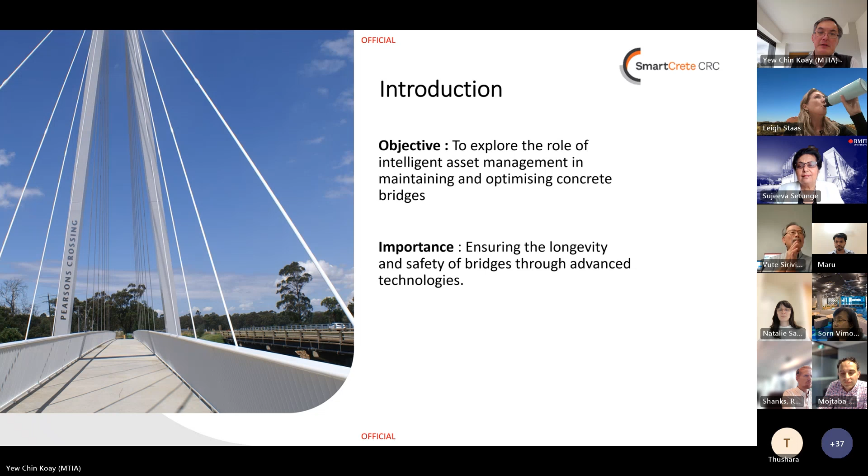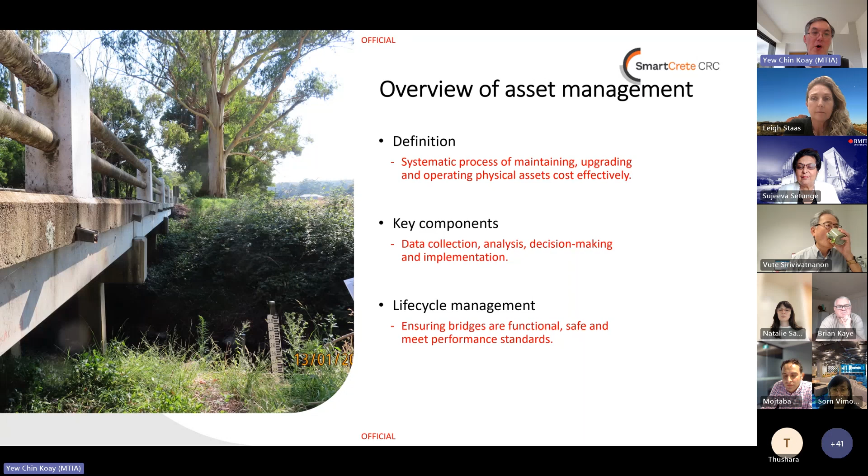This is quite interesting. I read the news yesterday, and I thought to share it with everyone.

In Victoria, the region will face ongoing growing pain because of aging infrastructure and booming population. Our structure is getting older, but the population keeps growing, meaning our old structure needs to accommodate more vehicles or more population. So try to imagine if you have an old structure but need to carry more load or more frequency on it. That is a challenging part.

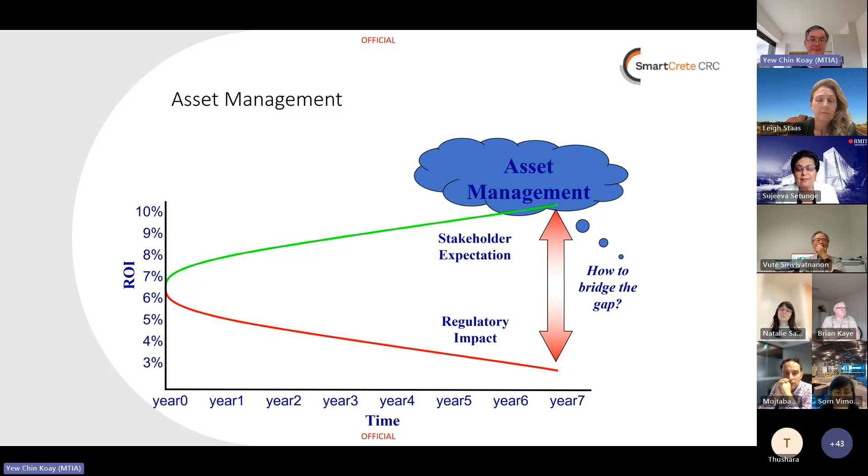This shows what the asset owner wants to achieve. The asset owner wants that when they initially spend more money, the risk should be much lower. That makes sense. But in further years, they want to spend much less money, and accept the risk increasing a little bit further from year 0. But the performance they always want centered, meeting expectations all the time, the same.

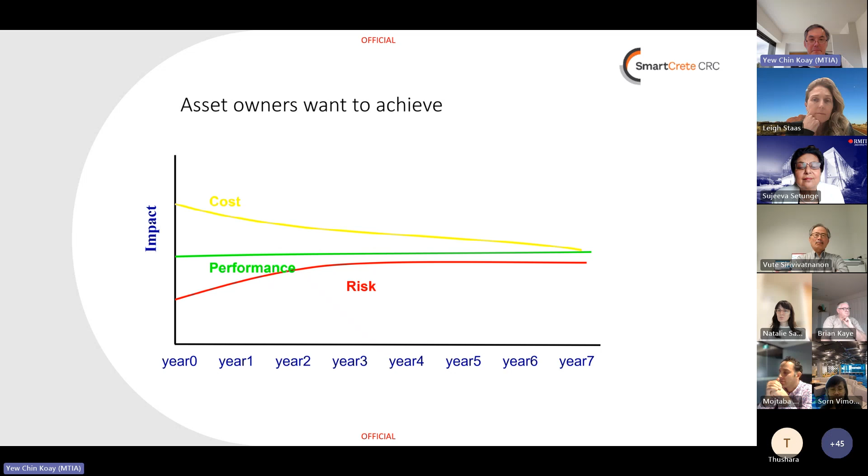But in reality, the nature of the infrastructure business is quite different. When you spend more money, your performance is much higher. When you spend less money, the performance is much lower, but the risk is much higher. So that is the reality.

Compared to the asset owner's perspective and the nature of the infrastructure business, there's an adverse gap inserted.

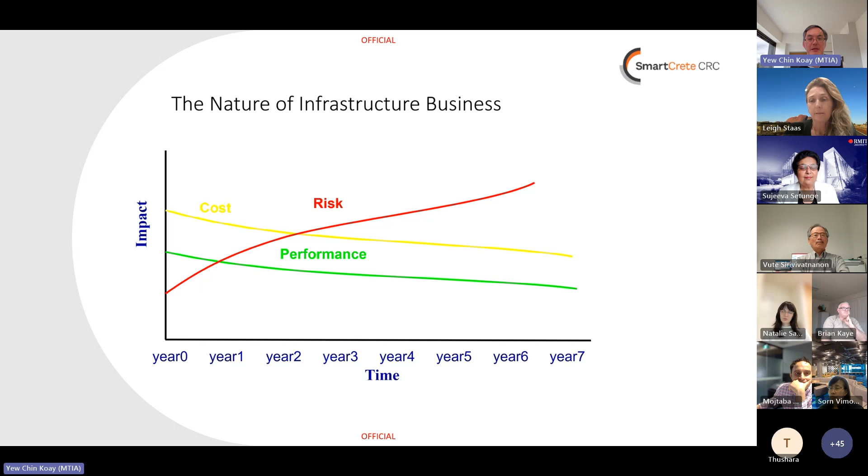So the most important key considerations, what are they? The important things are life cycle, cost, risk, and performance. That is quite important, what I call the core consideration. But the important thing for intelligent asset management is how to do the optimization, how to centralize the key decision making, and how to do the systematic process.

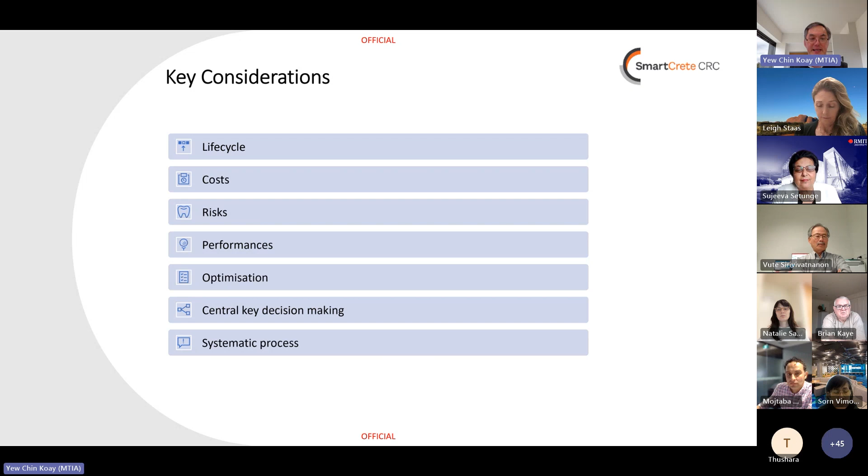Right now we move to the challenges in managing concrete structures. The challenge in managing concrete structures is aging infrastructure. In Victoria, 75 or 80% of bridges were built before 1975, which is about 50 years old already.

Another challenge is deterioration factors due to environmental exposure, load stress, and material degradation. Load stress is based on the vehicle. Back in the 1970s, vehicles were less than T44, 44 tons or less, or MS18 or HS20. But right now we have 160 ton vehicles, so we need to design the loading up to full SM1600.

Another challenge is limited resources. Budget constraint, I think, is a challenge for all asset owners. Every year they have a limited budget to maintain the structure.

The other challenge is expertise. Expertise in bridges, in different materials - they need to really understand the material behavior and structure behavior in order to do proper maintenance. That expertise is the challenge.

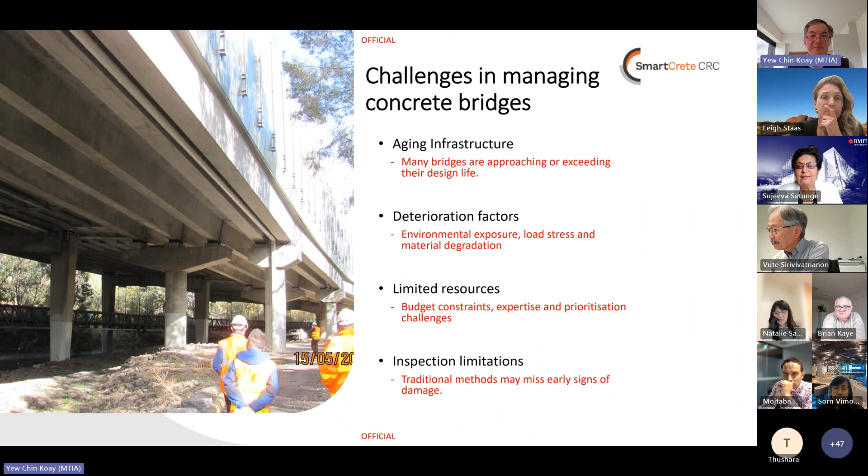And the other challenge is inspection limitation. As you know, some traditional methods have challenges like missing hidden defects. How can we train the inspector well to do this type of inspection?

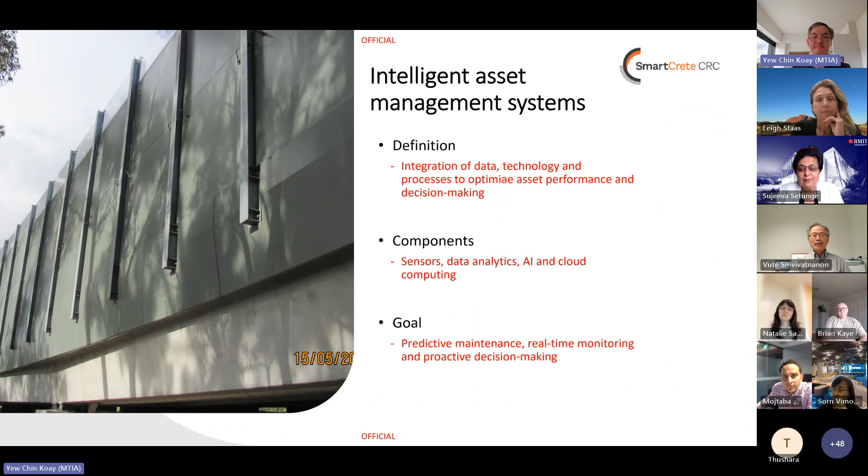I'll follow the start, but when I'll have a look later. Yep. Ashish, could you please put your, thank you.

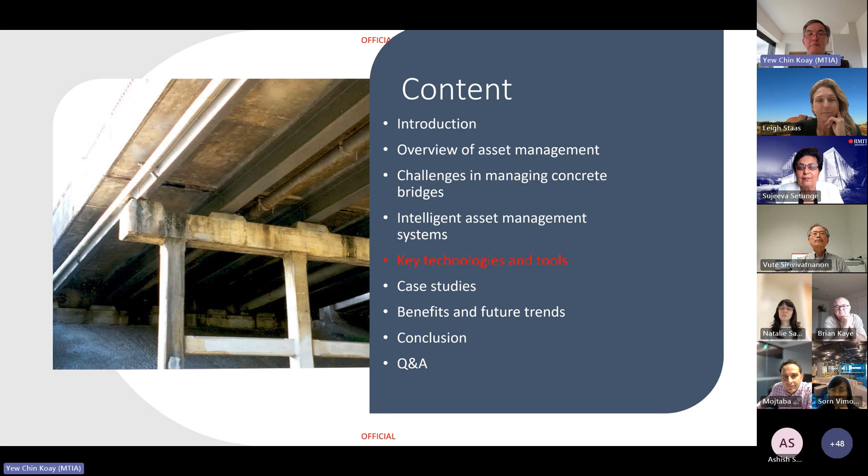Right now we move on to key technology and tools. The key technology and tools are sensors and IoT. This is all in here. I've highlighted in black and red color.

Black color is where we have trialed or done prototype testing or proof of concept testing in Victoria. The red color is still working with the university under a research project.

Sensor and IoT is structural health monitoring or real-time data on bridge condition, which we have done. I'll explain in my next few slides in the case study.

Data analytics is more on predictive modeling, forecasting deterioration, which I'll bring to my case study as well. For this data analytics for predictive modeling, we use bridge deterioration modeling, worked with the university 8 years ago to come out with the model, utilizing our inspection data.

AI and machine learning is for pattern recognition and identifying trends and anomalies in the data. It also does automated decision support.

Digital twin is more on the virtual model, replicating the bridge condition for analysis and testing, and scenario planning, simulating the intervention and their outcome.

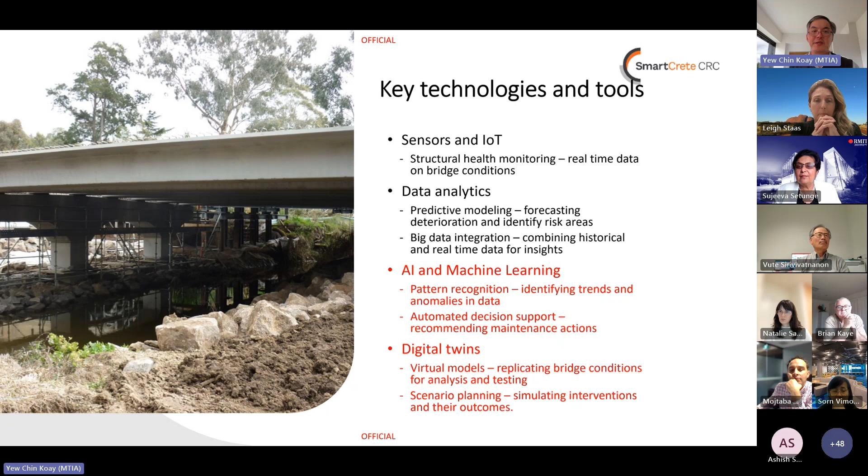So case study one is a deterioration modeling approach of the bridges. This was working with the university 8 years ago.

The approach is to utilize our inspection data. For the inspection data, we can do either an empirical approach or a physical approach. If you use the physical approach, you get more accuracy because you are very close to the structure, you can get the data you want.

But the empirical approach is more suitable for the asset owner who owns a lot of structures. They can't really do physical inspection for every single bridge, so they can use an empirical approach to develop a model and predict how the structure will behave.

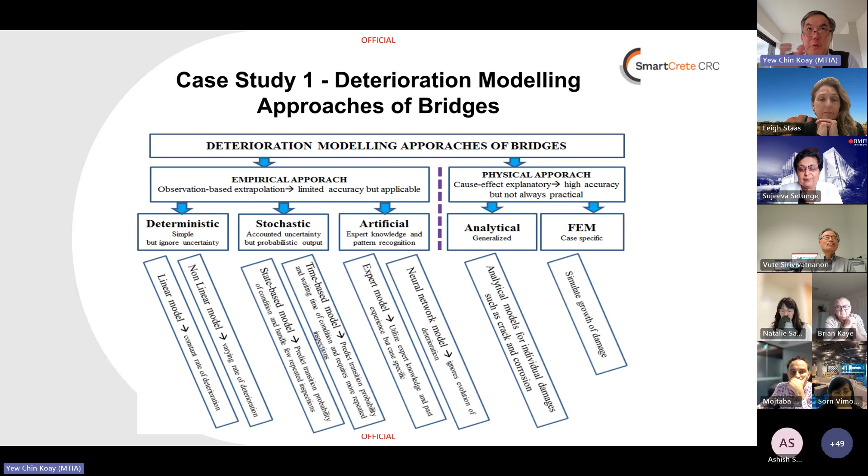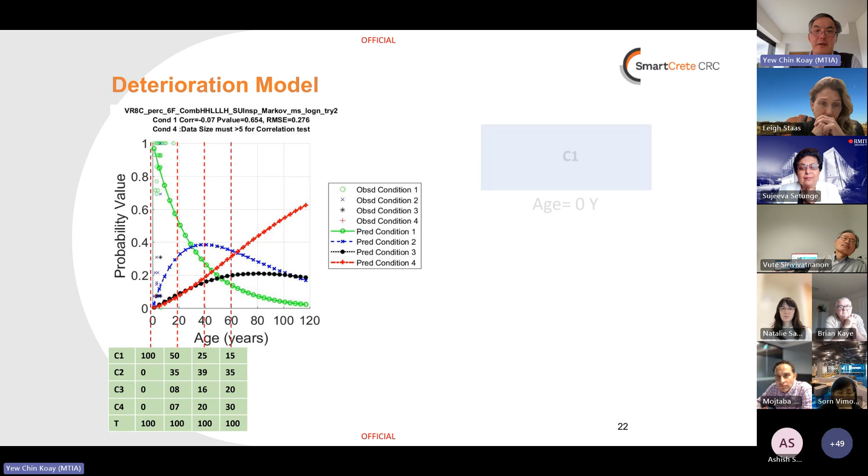This is one example I'd like to share. This is more on the probability value and the age in years. Here you can see the curve with condition 1, green color; condition 2, blue color; condition 3, black color; and condition 4, red color.

Basically at year 0, you can see the structure is like brand new, condition 1, meaning no defect. Condition 2 is a minor defect. Condition 3 is a major defect. And condition 4 is a severe defect.

So when you come to age 20 years, you can see that condition 2 is starting to be introduced, same as condition 3 and 4. So condition 1 is reduced.

When you come to age 40 years old, you can see condition 1 is getting less, condition 2 is introduced more, and condition 3 and 4 as well. So this deterioration model will help you predict how the structure will behave in the future. It also helps you predict the budgeting required to maintain or repair the structure.

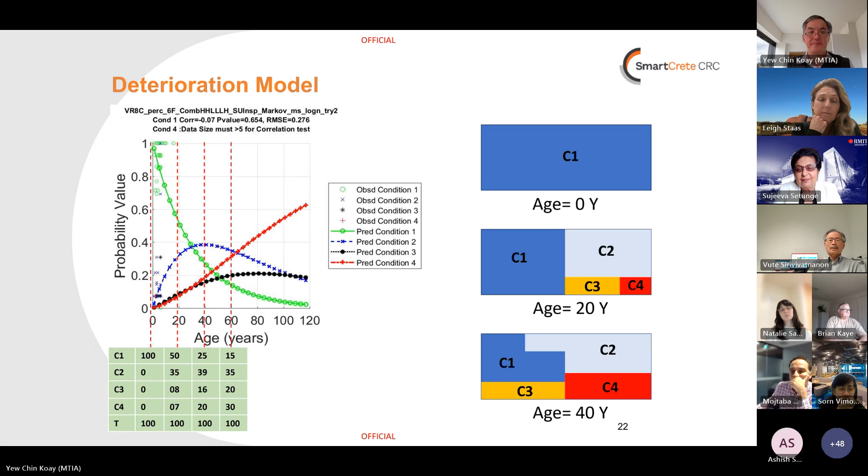The deterioration modeling basically relies on inspection data. That's level 2, which is condition inspection, and also inputs in the significant contributing factors. There can be between 6 to 14 of them. Then after that, you develop the model.

Then after that, the model comes out with a predicted condition output. The model needs to be refined as you get more data, and you can redefine the model to get more reliable predicted conditions.

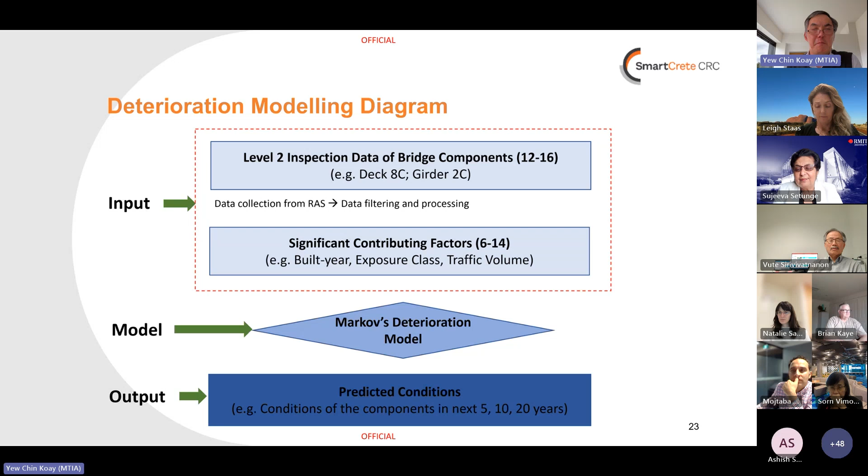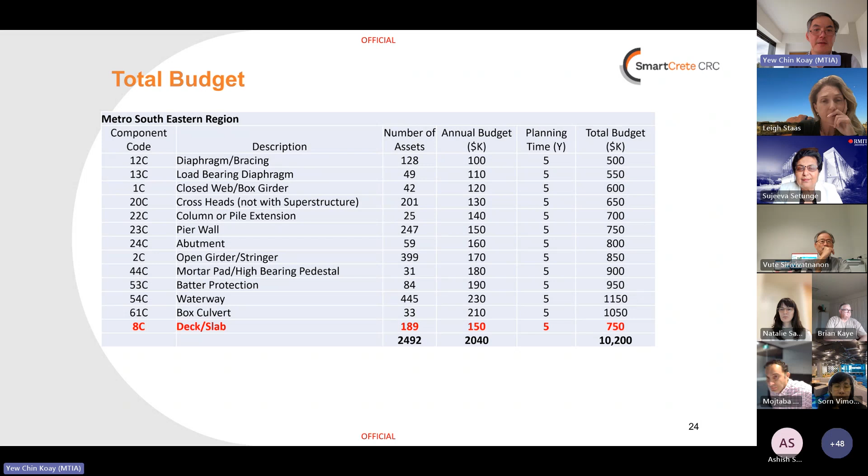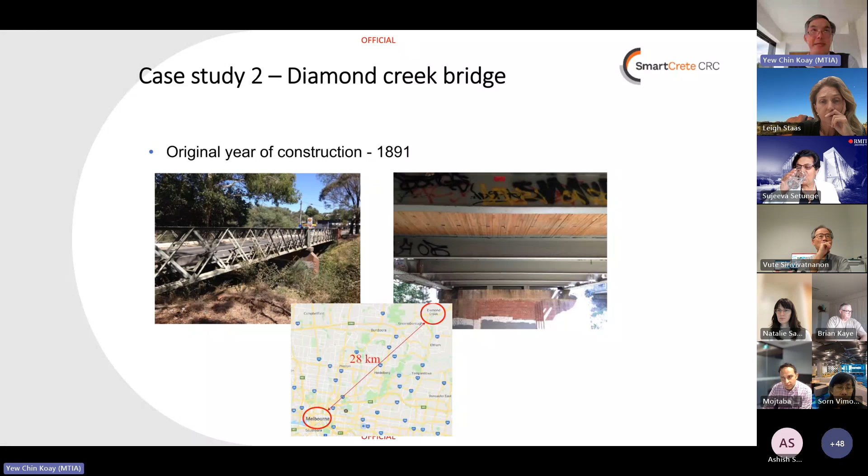The second case study I'd like to share is on the Diamond Creek Bridge. This is trying to use a sensor to study a new material and see how the structure behaves. Diamond Creek Bridge is a two-span steel structure, over 100 years old.

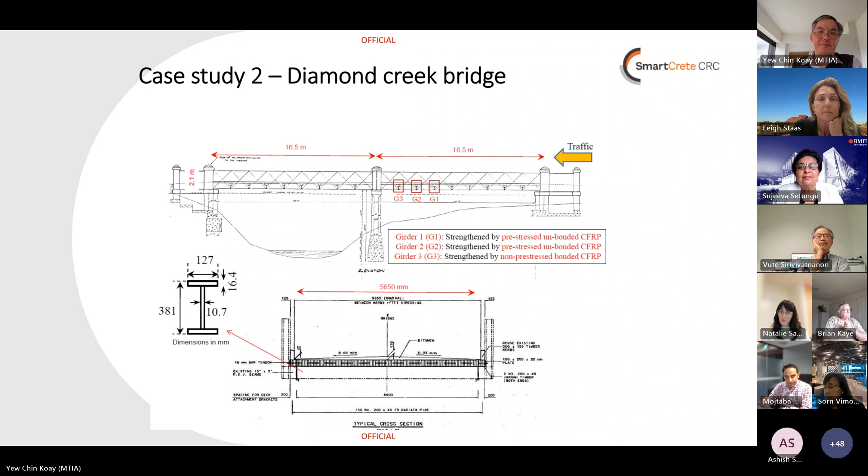We would like to use carbon fiber reinforced polymer to strengthen it. As you know, if carbon is attached directly to the steel, you get the electrode and that can form corrosion. So what we do is pre-stressed carbon fiber strengthening. This project is working with EMPA at the Switzerland University, and Swinburne and Monash University. We install a sensor on the carbon fiber to understand how it reacts and how the structure's behavior looks.

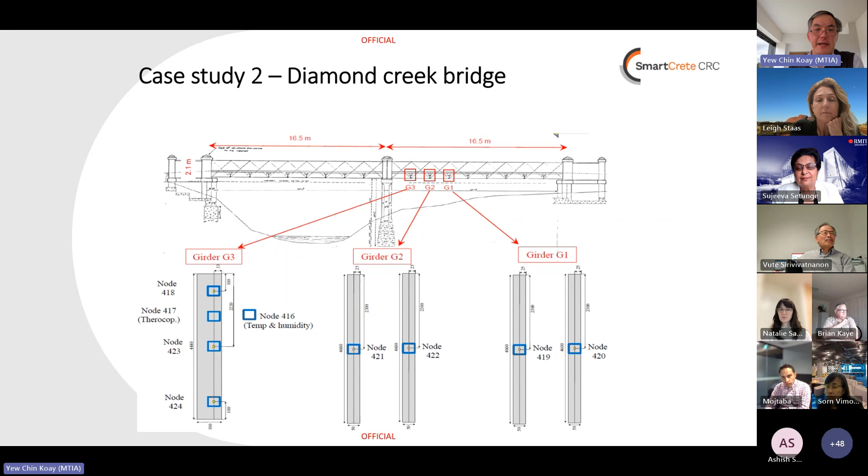So after we install the sensor, we get a full load truck to pass through and study the behavior of the structure. The third one is more on super load movement.

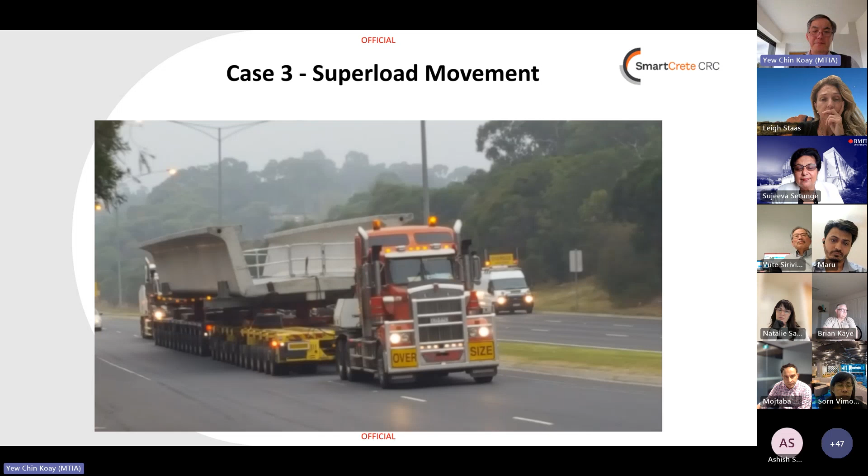This is an unusual or overload truck passing through the road network - how the thing looks, how to provide support on the road network. This is a U-trough for the level crossing project. They cast the U-trough in Kilmore and want to deliver it to Middleborough. So from there, they've got a structure - a substandard structure - to allow the truck to pass through. In order to minimize damage or prevent that, we install a sensor to monitor it.

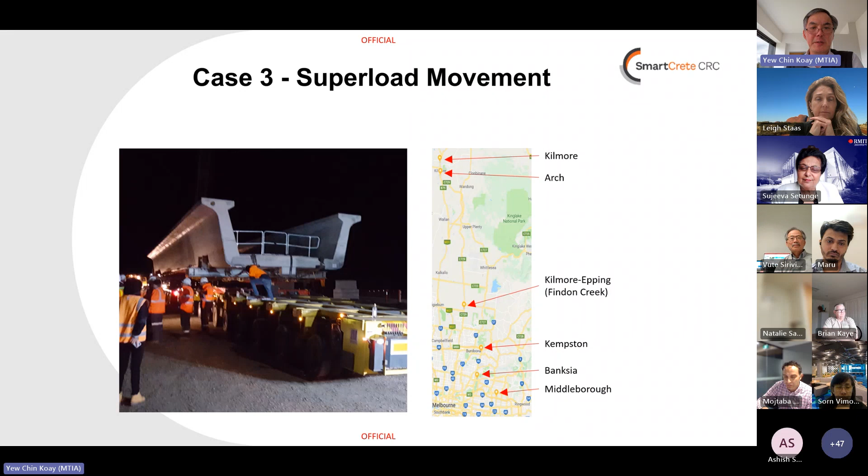This project is collaborated with Monash University to work on it. So this is a bridge here. They install a sensor to monitor the behavior of the structure.

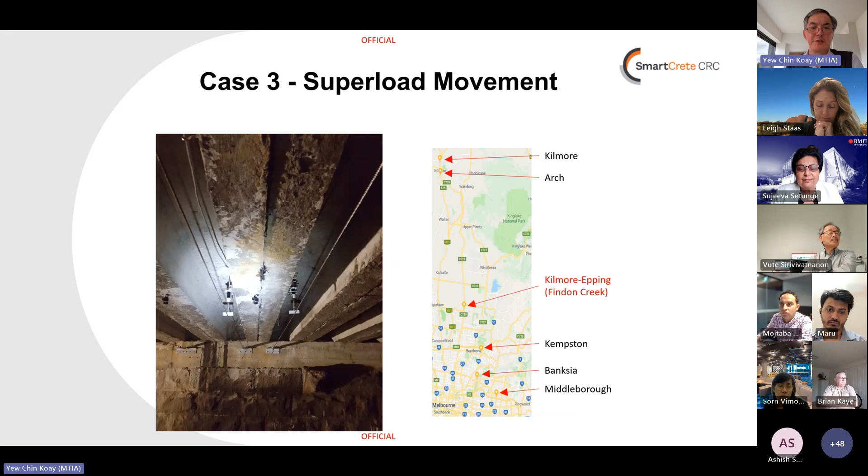And this is the Kilmore-Epping. It's a U-trough, a very old structure, built in the 1950s. We try to monitor whether the structure is able to support the truck passing through over the bridge.

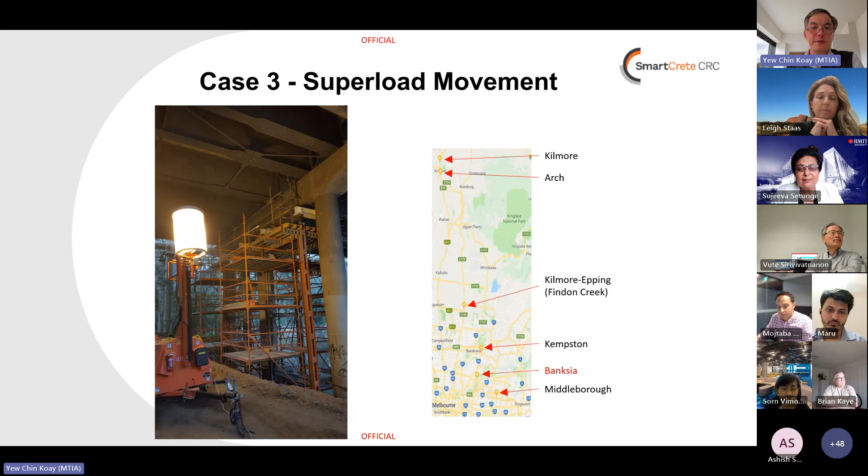And this is Banksia. It's a steel structure. We have to provide temporary support or strengthening to let the truck pass through over it.

The next thing I'd like to touch on is the benefit and future trend. The future trend in bridge asset management is more on AI-driven maintenance. We need to increase reliance on AI for automated decision making. We also need to leverage or utilize the integration of 5G, because 5G is coming and will enhance connectivity for real-time monitoring, especially for structures in regional or rural areas where you can get more stable connections for the sensors.

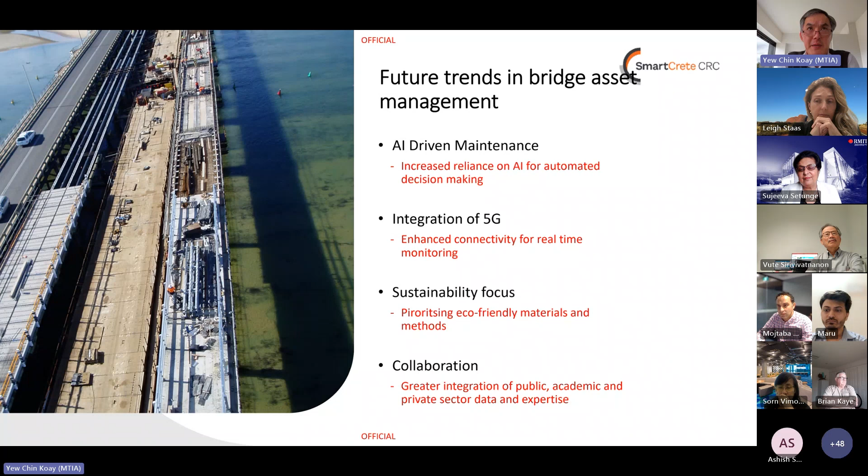Another thing to consider is sustainability focus, prioritizing eco-friendly material and method. I think most importantly, we need to bring everyone - the experts - together to get the project implemented.

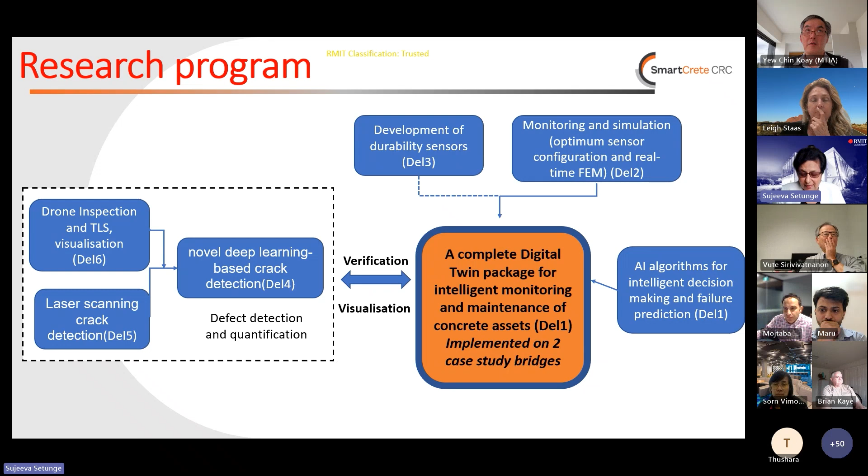This is a very ambitious target, and we brought together a number of different elements of research to achieve it. Around the central target you'll see monitoring and simulation, optimum sensor configuration and real-time modeling, development of sensors which you don't usually have, visualization, drone inspections, terrestrial laser scanning, crack detection, deep learning to identify and detect damage, and intelligent decision making and failure prediction for maintenance optimization. That's the plan we had.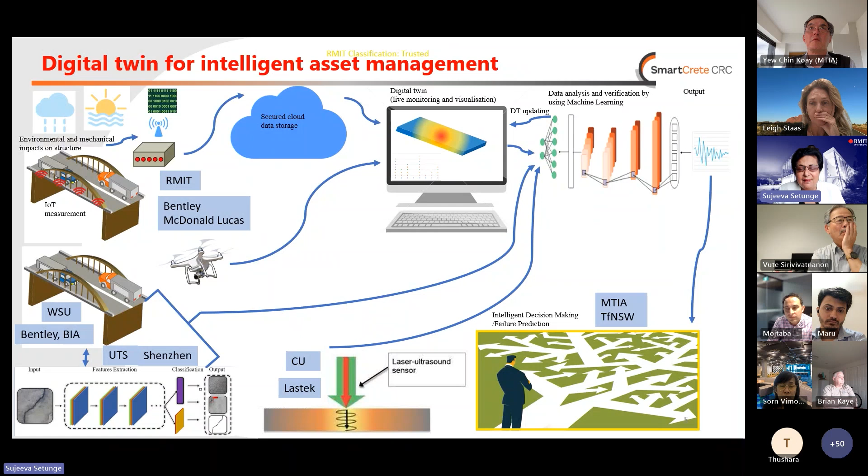When you look at the integration of colleagues from different research institutions, research teams, and our partners, it's a complex picture. However, if you divide it into several parts: health monitoring, visualization, and asset management undertaken by RMIT; visualization, specifically laser scanning, and parts of modeling undertaken by Western Sydney University; University of Technology Sydney specializes in deep learning for crack detection; and Curtin University focuses on non-destructive testing and damage detection using laser ultrasound. So we have our respective partners helping with different aspects of this research program.

The challenges we encountered are quite significant. The research challenges identified are, in the first place, optimized sensor placement. What we were looking at is that structural health monitoring is normally implemented in landmark structures.

It is not anything new. We do have these implemented in landmark structures, and we do have numerical models linked to the sensors. So what we were looking for is technology that can be deployed across a large number of structures, and in order to minimize the cost and optimize this design, we had to look at optimized sensor placement.

We had a PhD candidate at RMIT looking at this, and then, of course, numerical modeling and field validation. Now, I just want to mention that modeling and validation has been undertaken by others. But what we were looking for is a model which can then be queried to interpret the sensor data.

So we were looking at reverse order finite element analysis for interpreting sensor data, and then connecting the numerical structural model to a visualization platform, deep learning for damage interpretation, non-destructive testing to complement the digital twin, and also regular validation, calibration, and low-cost embedded sensor technology for early warning on durability.

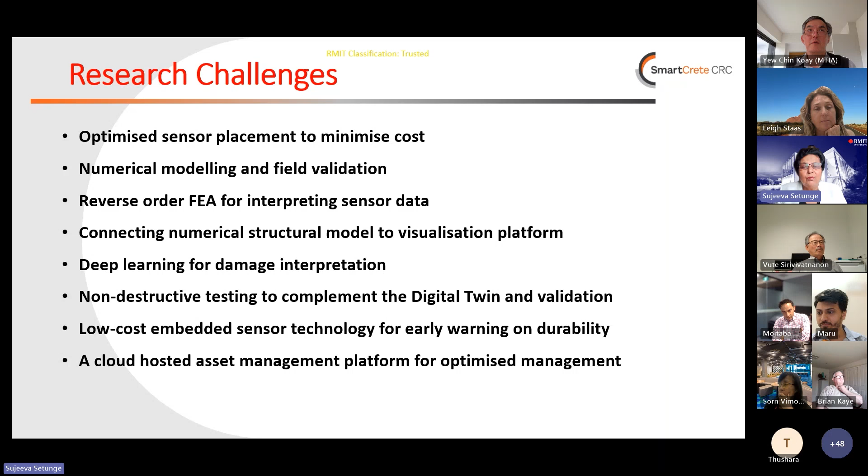So we started with a simple structure in lab and field. We looked at a laboratory-based structure, a very simple steel structure, to see how we do this reverse engineering, or reverse understanding, of the sensor input interpretation so that you can feed into asset management.

Subsequently, we used the steel structure provided by one of our partners, Beta International, at Dalrymple Bay Coal Terminal. This was undertaken by Mojtaba and one of his PhD candidates. Steel structures are easier to analyze than concrete structures, so we started with something known before we moved forward.

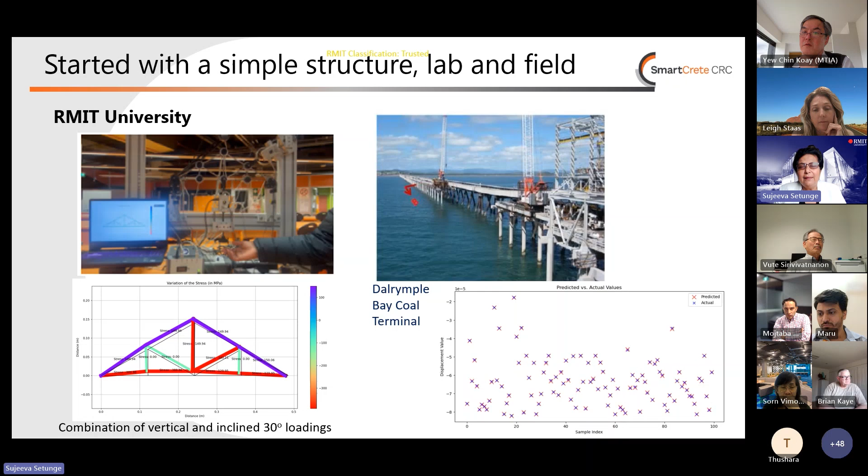At this stage, what we also figured is that live real-time finite element analysis can be quite time-intensive and also expensive for a partner. We looked at artificial intelligence as a possibility to enable us to understand the sensor data and interpret it in a reasonably fast manner. So that's what we moved forward with, and that was a PhD project again at RMIT.

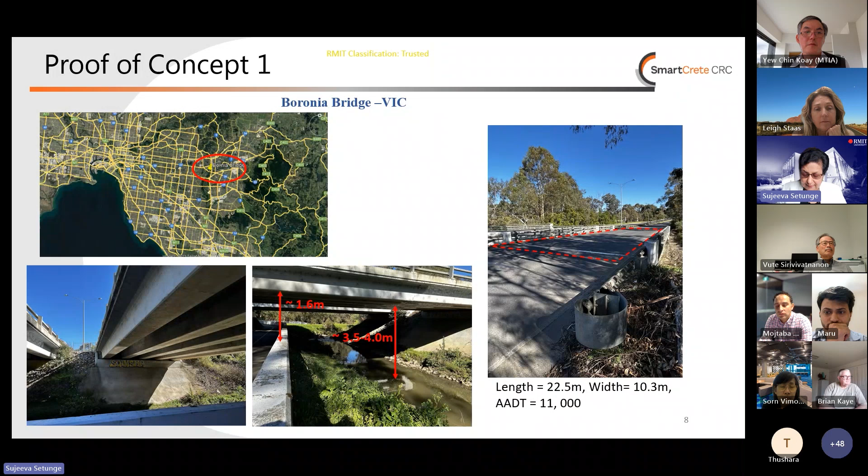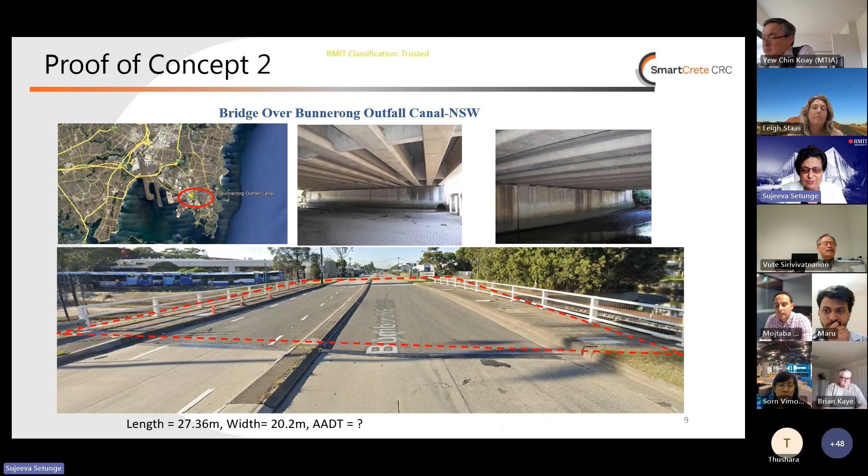With our two partners in the road authorities, we were able to secure two bridges as proofs of concept. One is the Boronia Bridge in Victoria, and the second is the bridge over Bunnerong Outfall Canal in New South Wales. The Victorian bridge is provided by Department of Transport Victoria, with Eugene's help, from Major Road Projects Victoria. The second bridge is provided to us by Harish Sivastra from Transport for New South Wales. We want to gratefully acknowledge their support.

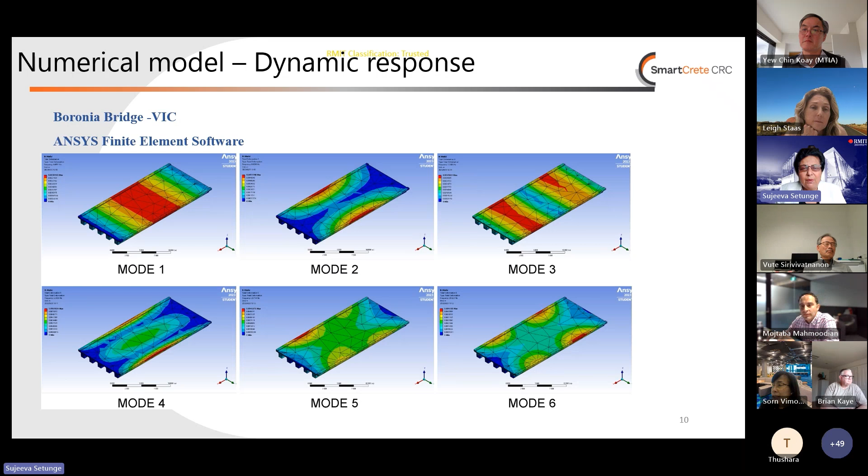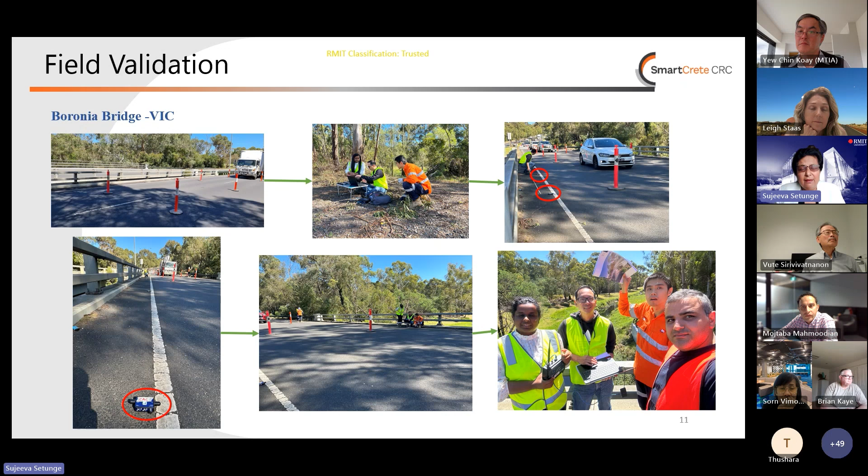So what we started is: first you need to come up with a model, and a typical fast method of validation is using the dynamic response. The modeling has progressed with significant input from partners, and drawings have been provided. We've been able to develop a reasonable model for dynamic response, and colleagues went into the field and worked with Department of Transport for traffic control. With their support, we've been able to validate the dynamic response of the structure, which gave us reasonable confidence about the ability to simulate the structural response.

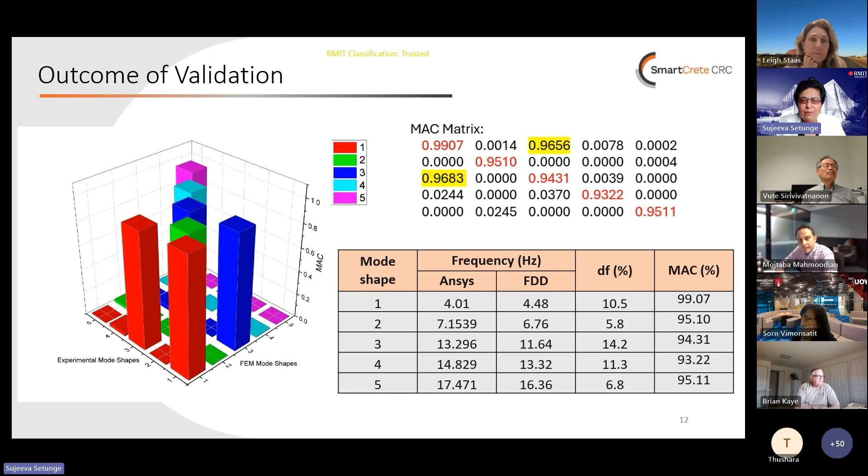I want to say that when we were selecting a structure to simulate, we identified concrete girder bridges as the cohort of structures we wanted to work on for this project, as they are the type most commonly used by road authorities. We thought if we could get these understood reasonably well, we could move forward. During the validation, we observed a reasonable degree of accuracy, giving us confidence to move forward.

The next stage we've been working on is identifying the best method of instrumentation, and we've trialed a number of different methods. We did instrument the bridge for dynamic validation with accelerometers, and for this second stage we are installing sensors which should remain for the life of the bridge. We had a number of challenges—one of our partners was supposed to provide us with sensors, and we did have some issues with that.

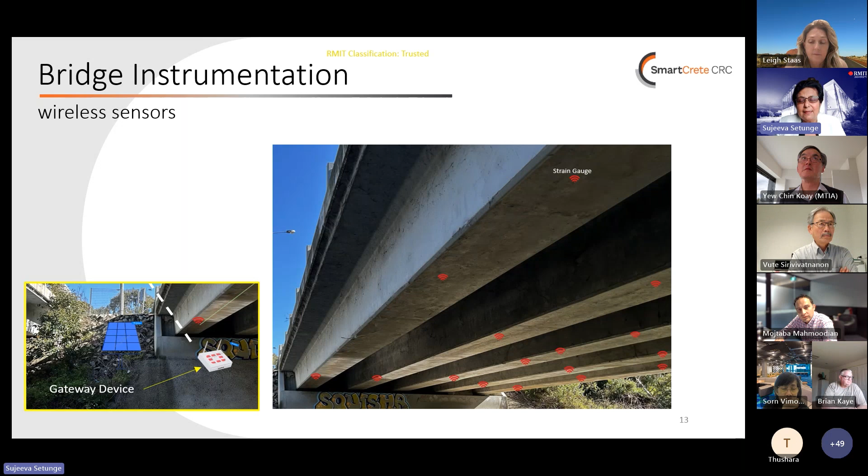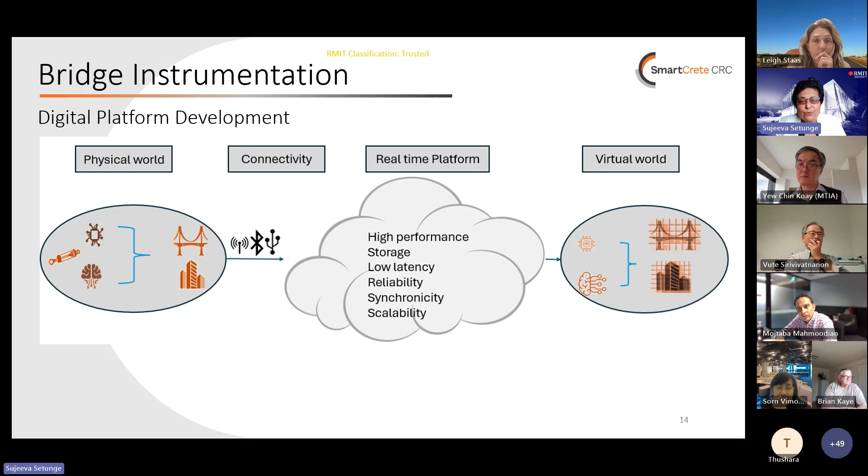Now we are moving forward with wireless sensors for the Boronia Bridge. The next challenge you face is: once you have your physical instrumentation, you need the connectivity, a real-time platform, and a link to the virtual world. We do have cloud access through our asset management platform, developed previously by RMIT, which is hosted on AWS. So we have access to the cloud, and this is what we will be progressing with. The second stage of modeling is now being completed to interpret the sensor data.

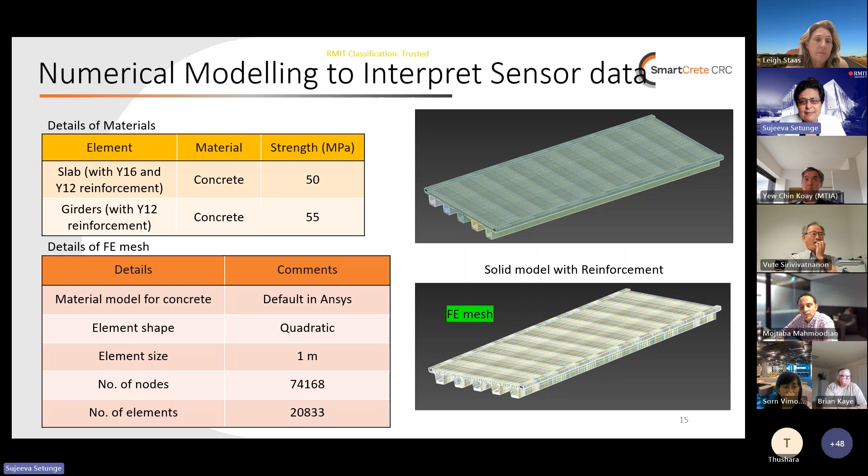As I mentioned previously, the plan here is that you have the sensors installed, your model creates the numerical representation of the structure, and then with artificial intelligence, if you run a number of simulations and create an adequate database, you can use AI to interpret the sensor output so that the road authority can have reasonably fast information from the digital twin.

The other element of the project is developing a durability sensor. Our expectation is that for most durability sensors, condition inspections usually receive information quite late during the degradation process. We were looking for a relatively inexpensive sensor which can be embedded into concrete and interrogated later to determine the chemical changes within the concrete, giving early warning when a structure is undergoing degradation. So embedded and wireless is the criteria I've given. I've asked Distinguished Professor Arnan Mitchell, who is leading this stream of the project, to come up with something inexpensive that gives us warning quite early. They are currently working on RFID technologies for this purpose, and trialing a number of different options for validation.

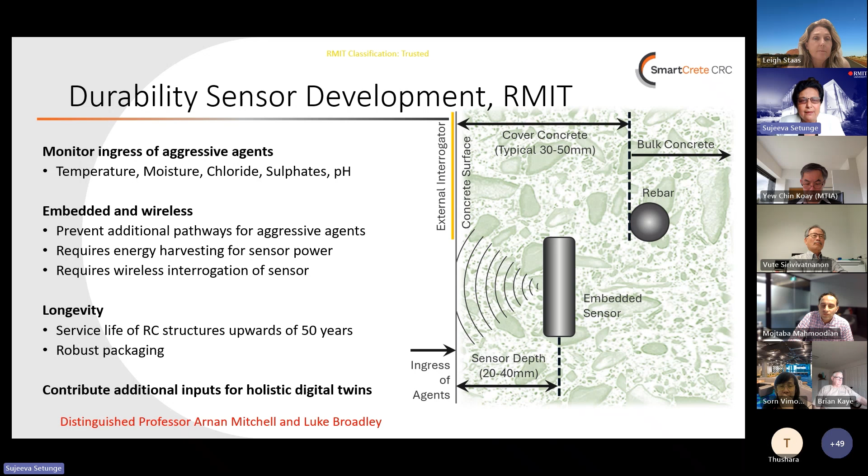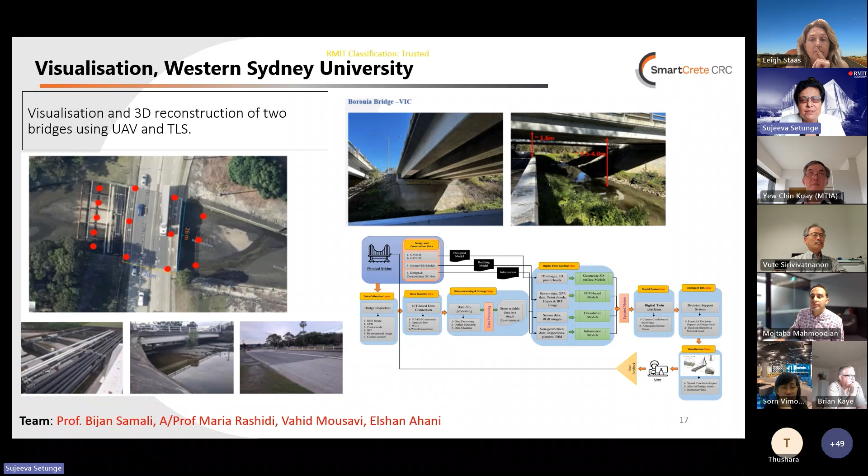Visualization is the second element of the project, led by the Western Sydney University team: Professor Bijan Samali, Associate Professor Maria Rashidi, and their fellows and students. They not only have expertise in visualization, which forms a major part of the project, creating 3D visualizations using UAVs and terrestrial laser scanning to capture the required visual images, but they also understand the numerical modeling validation aspects of the digital twin, which is very valuable.

Curtin University is contributing a non-contact laser microphone system for concrete inspections. This is another very important part of the project, developing a pulsed laser microphone system for generation and reception of acoustic waves, enabling damage detection for different types of damage. You have a concrete specimen with embedded steel bars and different types of damages being trialed in the laboratory for damage detection using pulse laser technology.

The project is led by Professor Abhijit Mukherjee and research fellow Dr. Subhra Majhi, who are progressing this work. The way this fits into the whole project is that once we have the visualized digital twin system, we will require regular validation, and the non-destructive testing method Abhijit and the team are developing is very valuable for that.

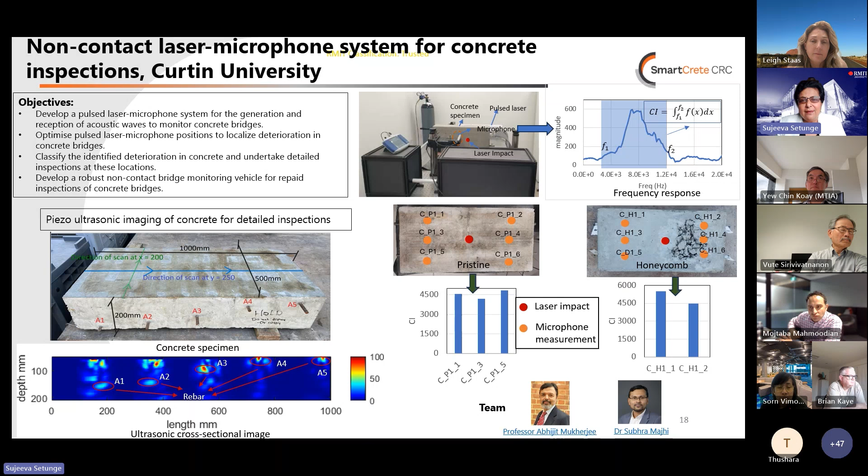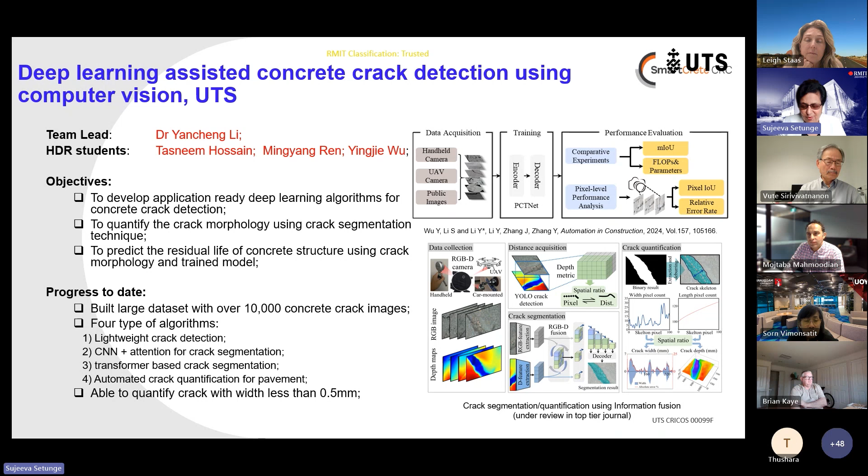The University of Technology Sydney is contributing deep learning assisted concrete crack detection using computer vision, led by Dr. Yancheng Li, who has been developing deep learning applications for different types of concrete crack detection. They are also looking at quantifying crack morphology, crack segmentation, and understanding the remaining or residual life of concrete structures using crack morphology and trained models. This is a significant piece of work contributing to the puzzle of optimized, intelligent management of concrete structures.

Finally, some of the work Yew Chin presented earlier about stochastic data-driven predictive models are embedded in a cloud-hosted asset management platform which RMIT developed, called CAMS, the Central Asset Management System. The system can divide a bridge into individual components, and for each element we have stochastic data-driven predictive models to predict degradation over time. We use a discrete Markov process and have developed transition matrices for 75 elements in the bridge inspection manual for this purpose. We've also created a mobile app for data collection. The Central Asset Management System is currently commercially deployed for property assets by RMIT University.